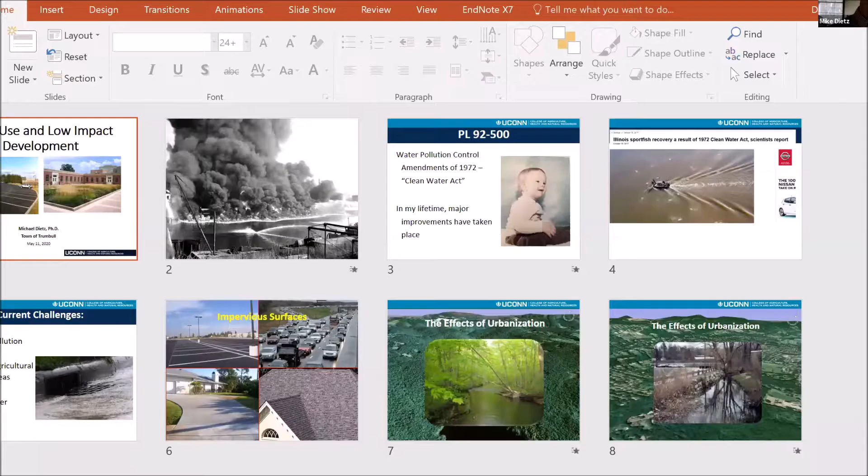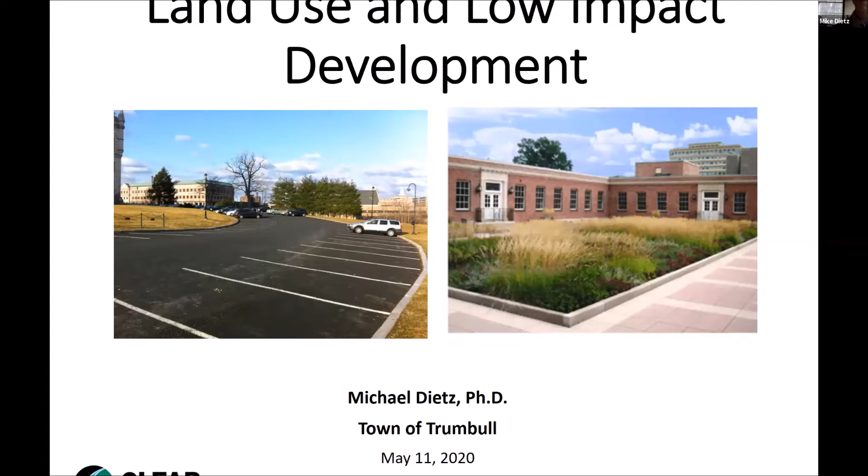Yes? Okay, all right. So I'm going to start with a bit of background information, and forgive me if you already know a lot about stormwater. I just need to make sure everybody's on the same page with a few slides on background stuff. Then I'll go through what low impact development practices are and some of the innovative things available for you guys to use in your town.

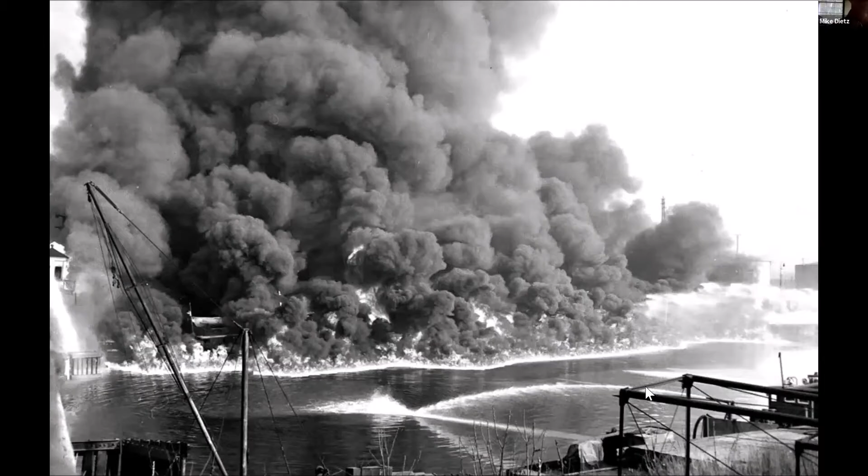So what happened as a result was PL 92-500. As many of you may be aware, that's also known as the Clean Water Act, but the formal name is the Water Pollution Control Amendments of 1972. 1972 happens to be a very good year — that's when I was born.

So there I am, and you can see by looking at me in my little frame here that I obviously had more hair in that picture than I have now. Some bad things have happened over the course of this lifetime, but as far as water is concerned, major improvements have taken place in our country, and certainly in Connecticut, as a result of the Clean Water Act.

Just as an aside, the Clean Water Act and Clean Air Acts were proposed and initiated under a Republican administration, but passed with strong bipartisan support because there were so many people, such a grassroots effort, that wanted this to happen. It's really hard to imagine this kind of bipartisan effort making something positive happen for everyone, but that's really the way it was. So just a quick slide here.

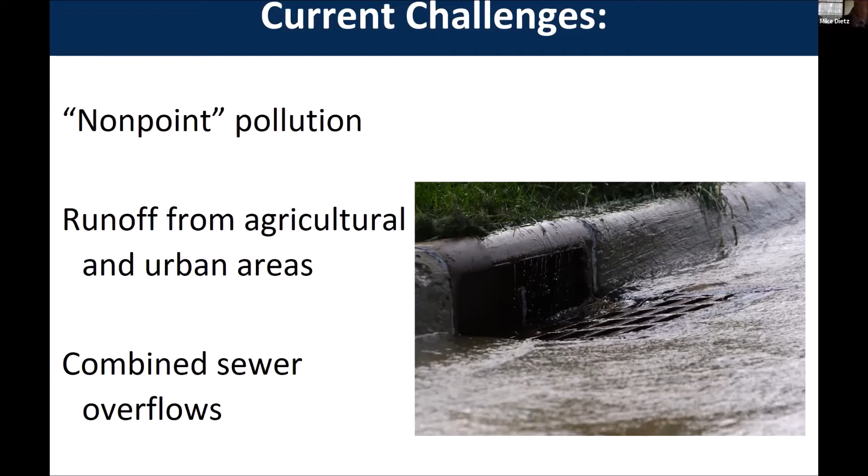What we're dealing with now is what we call non-point pollution. This is runoff from diffuse sources, from agricultural and urban areas. I'm only going to be focusing on the urban stuff tonight, but agricultural runoff is also a form of non-point pollution. Combined sewer overflows also factor into this, because there's an input from the stormwater system that causes those overflows. I'm not going to talk too much about those tonight, though I can answer questions if anybody has one.

The stormwater stuff I'll be talking about certainly plays a role in those combined sewer overflows. So what really is driving these issues we're faced with now with non-point pollution are impervious surfaces. These are surfaces like parking lots, roadways, driveways, rooftops, anything water cannot pass through.

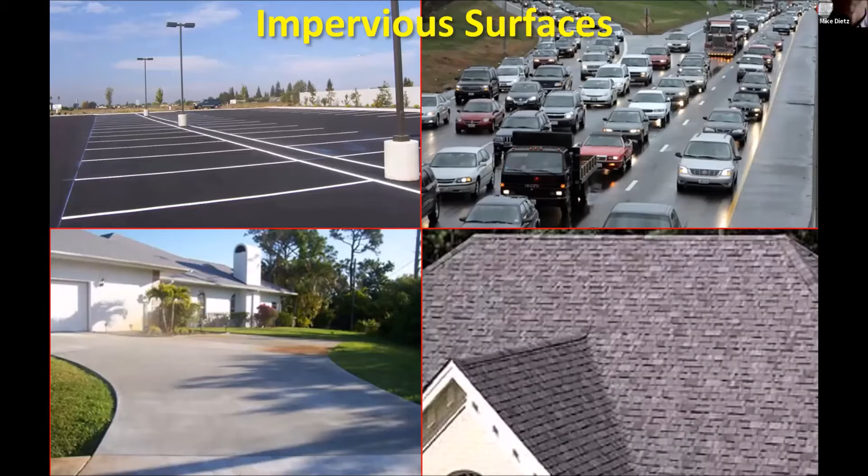Next we go one tick up the scale of urbanization. So we have some subdivisions, a few roads. A watershed like this might have a river draining it that looks something like this—a little bit different. We can see this parking lot very close to the banks of the river, and this armoring of the banks, these stones installed here, because we've started to see changes take place in the hydrology due to all that impervious surface in the watershed.

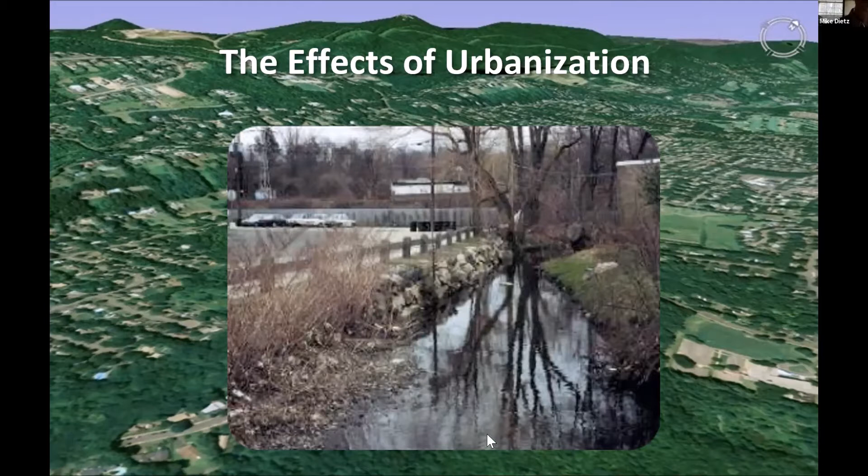We don't have as much cover over that stream keeping it cool in the summer, so it warms up quicker. These are just a few of the things you can see here, and the shape of the stream tends to get more channelized and straightened as well—a little more developed.

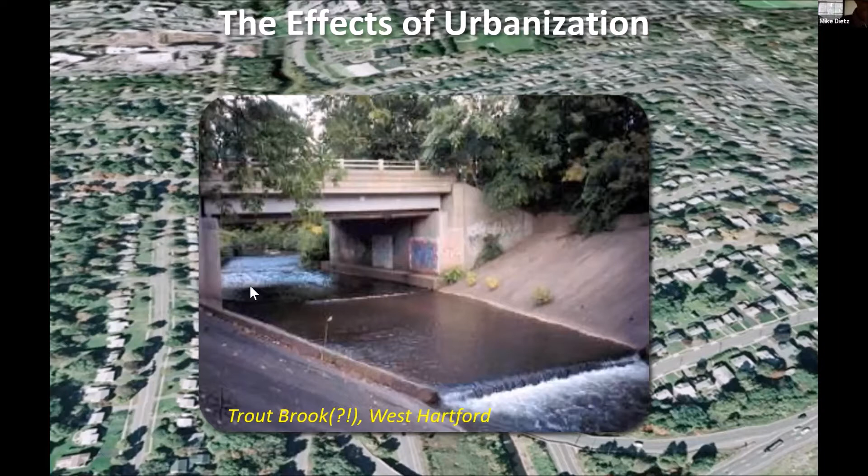This particular example is from West Hartford. If you ever venture up that way and you've seen the exit off Route 84 for Trout Brook Drive, and you look at the concrete lined channel there, and you like to fish for trout, you probably know there aren't going to be too many trout in Trout Brook these days. When we see all this armoring of the channels, you're losing all the habitat for aquatic life, and it's really not very supportive at all.

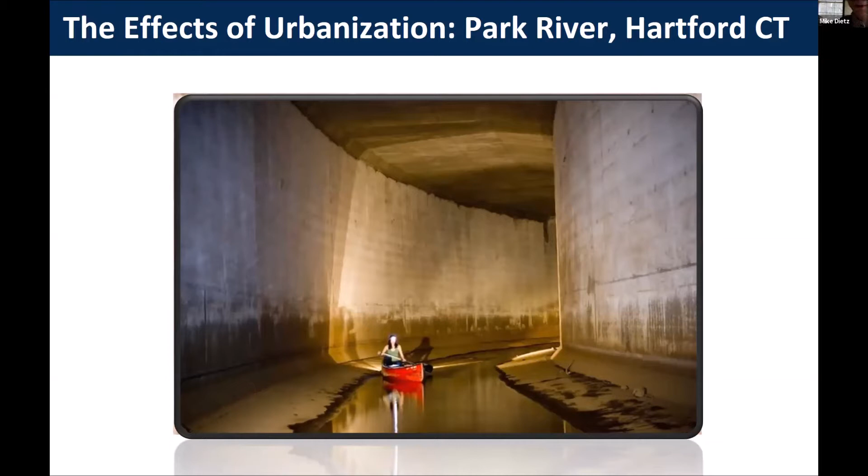That was when the Park River was put underground because of major flooding that happened in the 1950s and earlier that devastated the city. So they channelized the Park River and put it in a conduit underneath the city, and this is what the Park River goes through today. Really no opportunity for aquatic life to survive down in those kinds of conditions, as you would imagine.

So this is just a visual representation of those changes that have taken place. Again, here's that undeveloped watershed. There are going to be two graphs here. So the time is on the bottom, maybe over the course of a day or so. And on the left-hand axis here, you'll see the flow rate. I have CFS, that's cubic feet per second, but it really doesn't matter. The flow rate is the volume of water per unit of time.

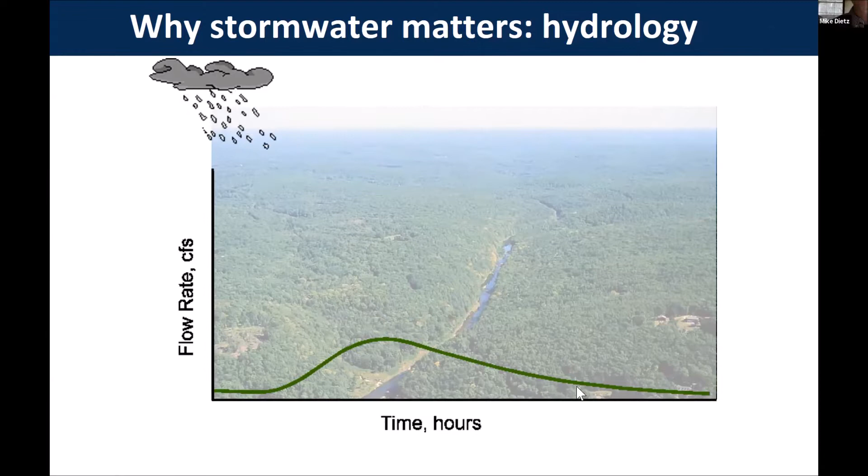So if we have a rainfall event happen on that undeveloped watershed, we might see a response that looks something like this. So we have this base flow level in the stream. You see a gradual climb up, a slow tailing off of that flow rate in that stream. For that very same rainfall event on a watershed that has a lot of development in it, like this one that you're seeing here, we would see a very different response in that stream.

So we would see much more runoff and a higher peak rate of runoff. So there's more volume coming out and it's coming off faster and it's getting there quicker. All right, so the timing of it has shifted too. So major changes to the hydrology, and this also drives changes in the quality of those waters too.

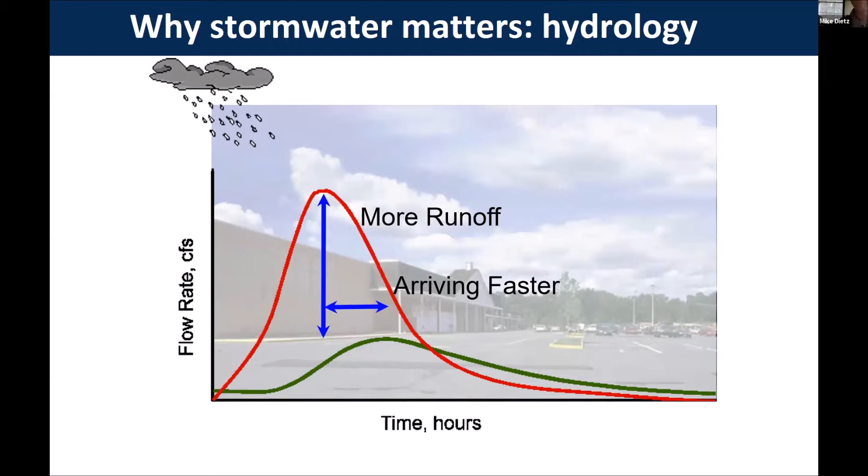So can you still hear me okay, Mary Ellen? I see somebody just came into the waiting room. I assume Bill will let her in. Yeah, I can hear you.

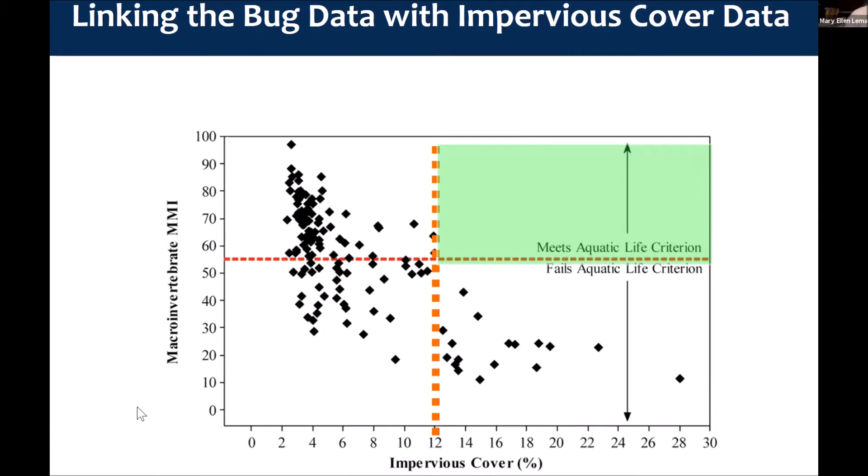Okay, good. So I'll just give you a quick view from above that will set up some of the Trumbull-specific information I'll share with you here. Some of my colleagues at the Center for Land Use Education and Research have put together some satellite data that looks at what the land cover in each pixel is. These are 30 meter by 30 meter pixels, so pretty coarse, like 100 feet square, but it's useful when you look at a large area like this over the entire state of Connecticut. This is the link for those data here if you'd like to check it out.

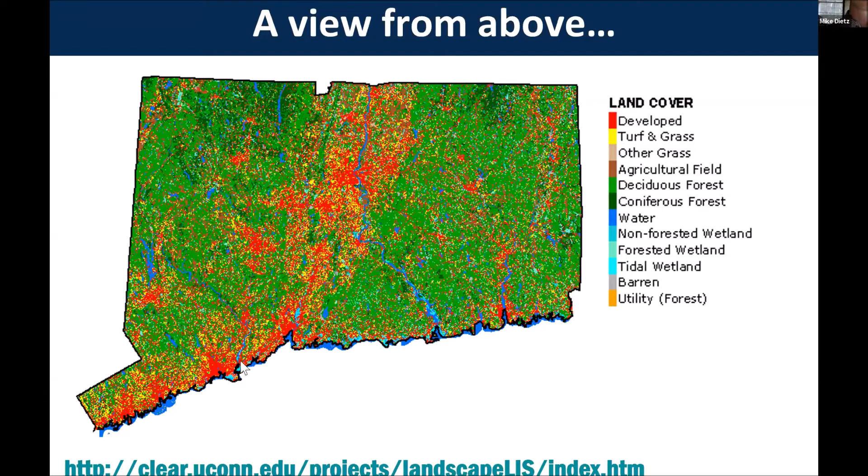But what this represents, the red pixels that you can see here are developed lands. Each pixel, the software makes a decision as to whether it should be classified as developed or deciduous forest or evergreen forest. The green pixels are the forest classes. But you kind of get the idea where our development is in the state. Around the center here, we've got Hartford and East Hartford. Down along the coast, we can see New Haven. Further southwest, you can see the Bridgeport cluster here, and you guys are obviously just north of that.

So over the course of 30 years, from 1985 to 2015, over the whole state of Connecticut, this is what happened. 155 square miles, not acres, square miles of developed land were added in the state in that 30-year period. 80 square miles of turf and grass. The turf and grass, as you would imagine, goes along with residential development. When you have houses and sidewalks, you get lawns to go with it.

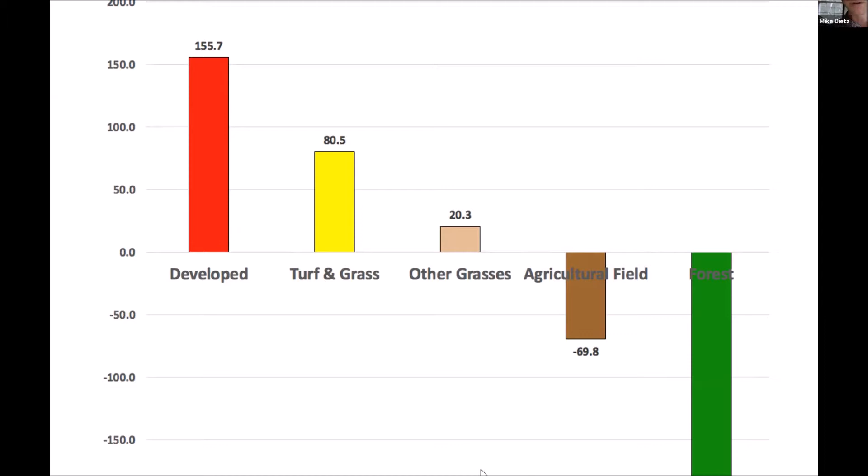So where did it come from? These things have to be at the expense of something else. So we lost agricultural fields, about 70 square miles, and 180 square miles of forest, the green one here. So you can see how this shook out over a 30-year period across the state. Pretty scary. If we compress all that development into one corner of the state, it would fill up Litchfield County, and turf and grass would fill up Middlesex County. So quite a large area when you look at it across the state.

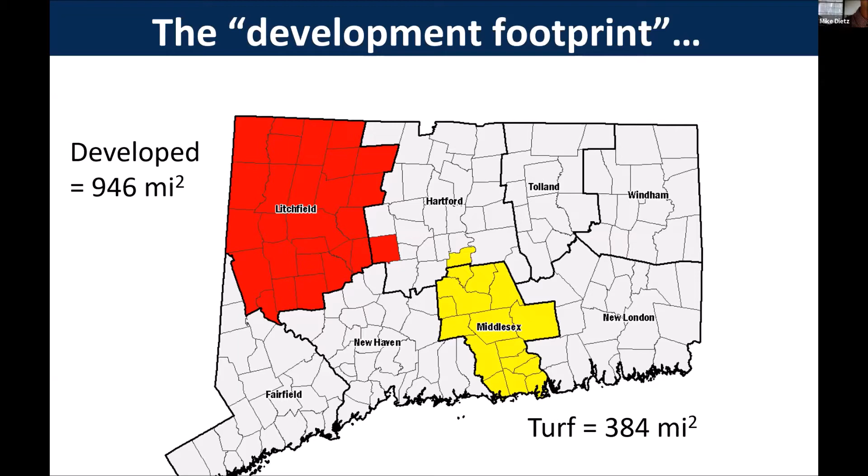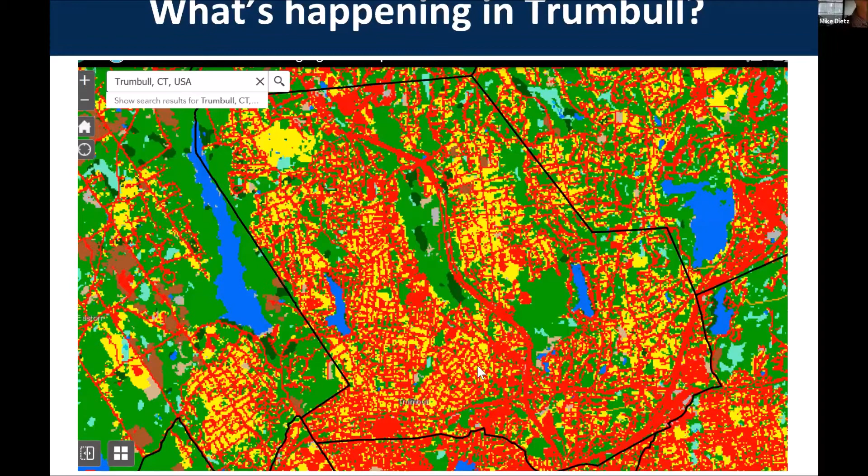So you can see there's your breakdown for 2015. So your developed lands in the town of Trumbull are about 44% of your total land area. Your forest, let's see, deciduous forests and coniferous together are about 32%. So that's your green, about a third of the town. And then about 20% is turf and grass. All right, so 44% impervious or developed land is a really high percent. If you look at it as far as averages across the state, that's one of the more developed towns that we see.

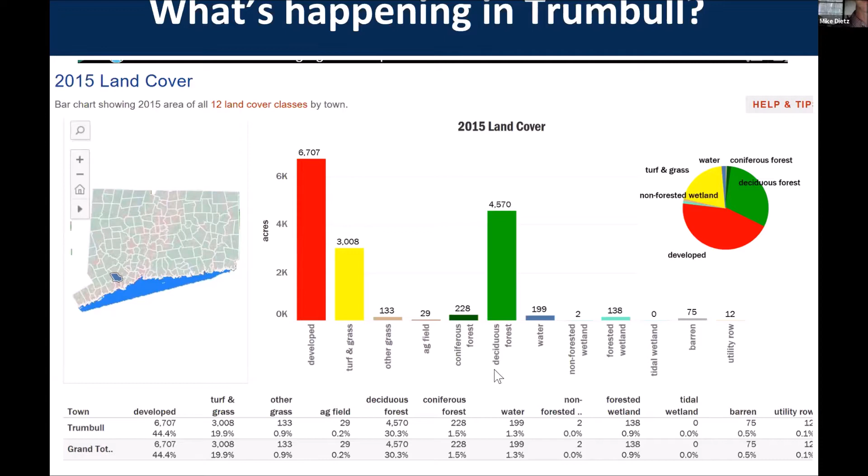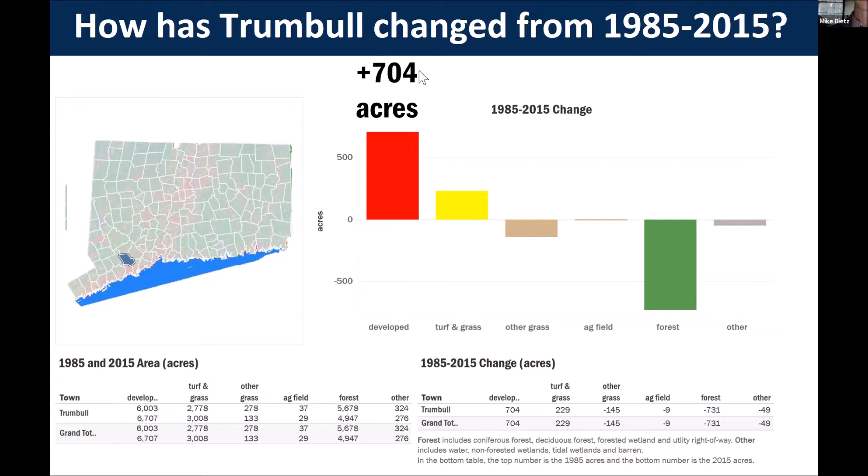And then if you look at what changed in the town from 85 to 2015, here's how it shook out for you all. So the numbers are small. Again, I'm not going to force you to look at those numbers in the table down there. I just put that for your reference. But what happened here, you added 704 acres of developed land. You added 229 acres of turf and grass. And you lost 145 acres of other grass. And you lost 731 acres of forest land.

All right, so you can kind of see how it all adds up and subtracts out over the course of time. So that's a decent amount of impervious land, or developed land, added in a 30-year period. So maybe I'll just pause there for a second and see if anybody has any questions about that before I move on. Is that surprising? I'm sure that just like other parts of the state, the past few years since the recession, we didn't see a ton of growth. So I would say since 2012 or 15, probably haven't had a huge growth spurt in the state like we have in some parts of our past. But we all are well aware of the building booms that happened in the 1980s and 90s around here. Good. So if there are no questions.

I have a question. Yeah, sure. Go ahead, Marshall. Okay. We are a fully developed town. There's virtually no undeveloped land. We're at a tear down and rebuild stage. Gotcha. And I know as I've sat through zoning hearings and things, we're looking for changes so that what's being done will take the groundwater, not have runoff, to take care of those changes. So looking at really what happened until 2008, where we reached fully developed, I don't get as nervous because we don't have the acreage to lose anymore.

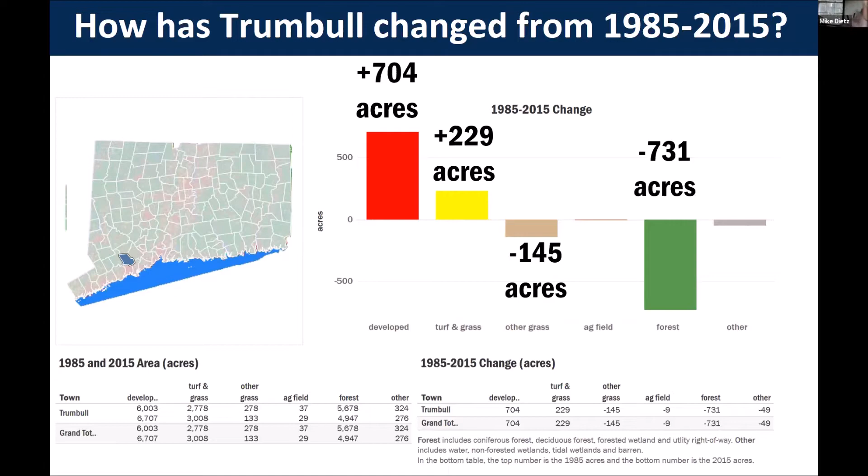All right. So this is just the last little piece here about really the magnitude of this issue. So I come from a blue collar family. My uncle is still in the construction business. So as you can imagine, with me as a water guy talking about this stuff, sitting around our holiday dinner tables, the conversations can get quite lively. So my uncle always tells me, what are you worried about? It's not that big of a deal. It's just rainwater. Why do you make such a big deal out of it?

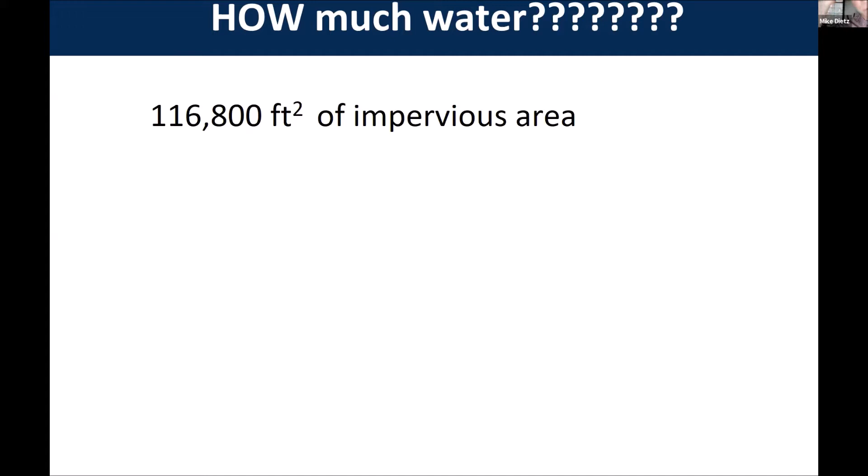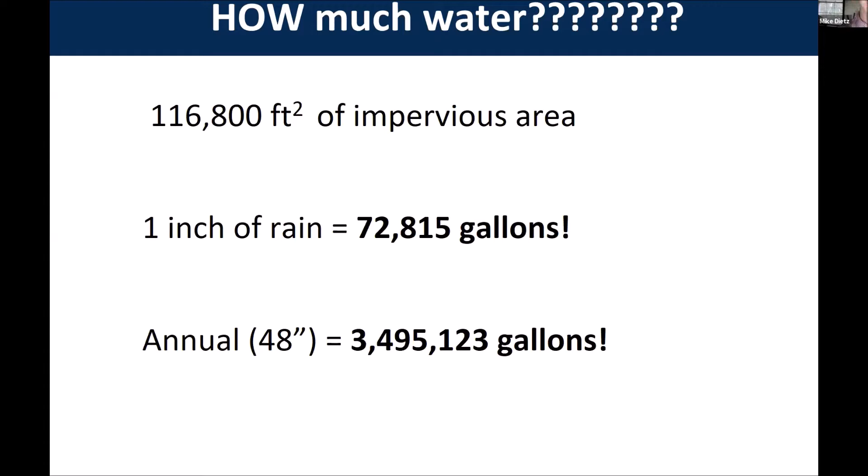If we get an inch of rain, 72,000 gallons of water are gonna run off that site. 1 inch of rain. You think about how often we get an inch of rain. It's pretty common around here, right? That's an unbelievable amount of water that has to come off that site, and it has to go somewhere. In an average year, we get about 48 inches of rain, 3.5 million gallons off of 2 small buildings and a parking lot.

So now I know, as you said, you are a developed town, but go to Bridgeport, go to New York City and multiply those numbers that I just gave you from that one tiny little site. And you'll see just for a simple 1-inch rainstorm, the billions and billions of gallons of water that have to run off and go somewhere. Now you can understand the magnitude of that problem. So it really is a big deal when you add it all together.

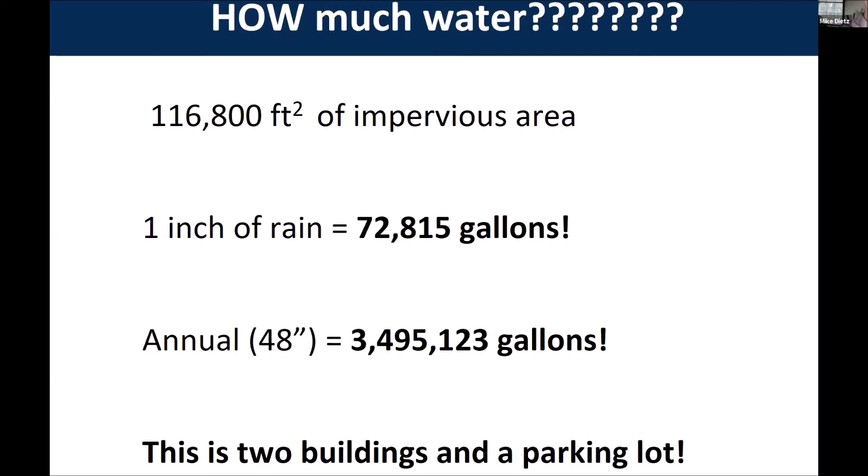So now we'll go into what we can do about it. So I'll talk about low impact development and site planning here. This is also called green stormwater infrastructure, but the term low impact development, or LID, started in the 1990s from the state of Maryland. They were dealing with issues with the Chesapeake Bay. So all the goals of low impact development really center around that hydrology that I've talked to you about. So trying to preserve the hydrology of that site before it was developed. That's the bottom line here. All right, so all those things that go into that are what we're trying to focus on.

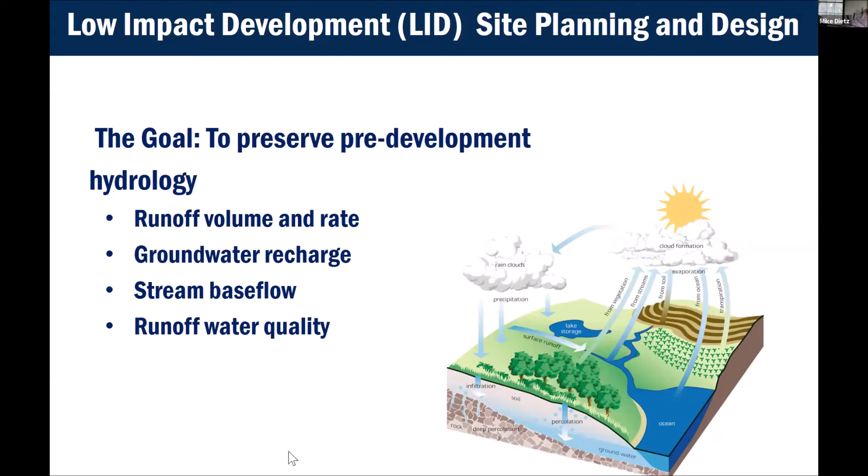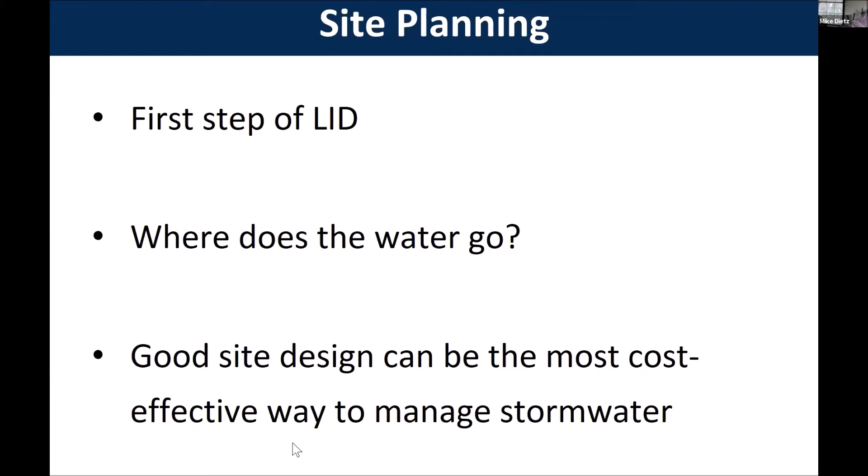The planning of that site before any development even occurs, and again, I understand you guys aren't in this phase right now, but even with a redevelopment, proper site planning can really go a long way. So just asking, where's the water currently going? Is there a way we can take advantage of the natural system, natural movements of the water that are taking place? Instead of having high cost things to put in, can we design it in such a way that it manages water on site?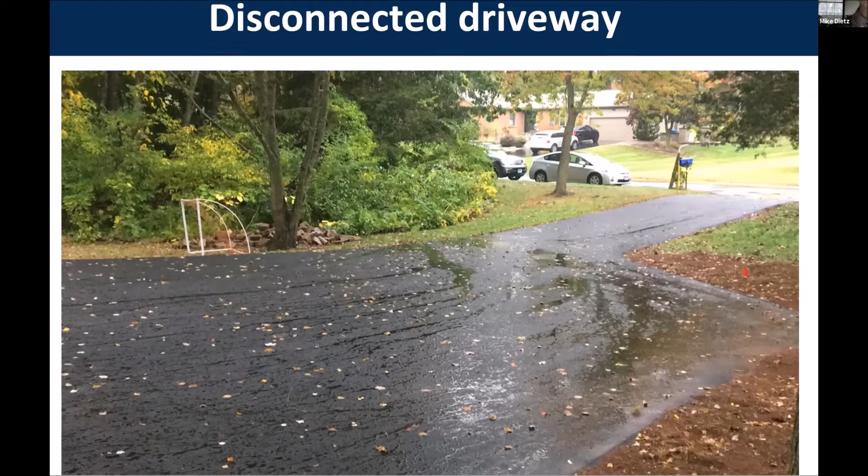So this site design, and again, every site is different, but sometimes you do have the ability to make a small change in where water is directed, and that can save a lot of money in the long run. So the practices that we'll go through here, we'll talk about bioretention or rain gardens, pervious pavements, green roofs, and rainwater harvesting.

The gutter downspouts come down the side of the house. They're angled through the foundation and they go into the sewer line inside of the house. So the roof of that entire building is fed directly into the sewer system and is part of that combined sewer problem that we have in Hartford and many of our other big cities. So a very simple disconnection of that pipe and directing that water out into the front yard made a tangible difference here at this house. And no, one house didn't solve Hartford's water quality problems, but you add all those houses together and look at the potential disconnects that you could do, and then it really starts to add up.

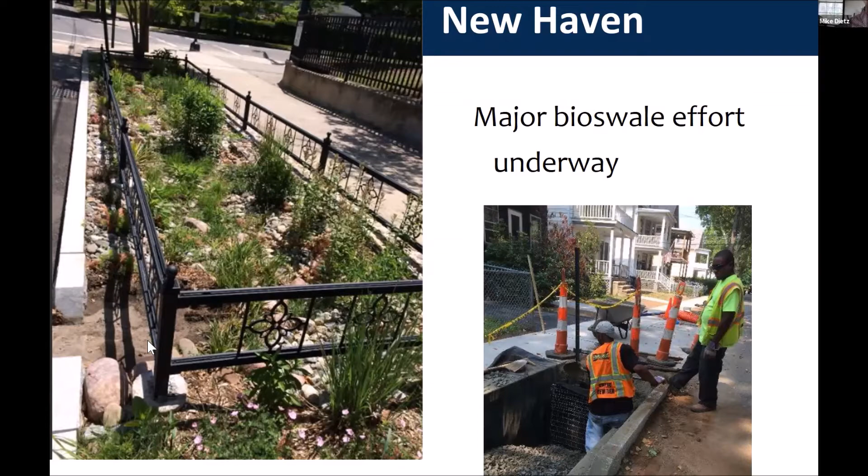Here's another example, New Haven, another heavily developed city. They have major issues with combined sewer overflows, so they have a big effort underway to handle stormwater and keep as much of it as possible out of the system to avoid that problem in the first place.

Then down in Washington, D.C., I was there for my annual conference in February. I just happened to walk by these, didn't even know they were there, but two blocks off the mall in a heavily developed area with basically impervious cover everywhere you look, they redeveloped this site with rain gardens in between the sidewalk and the road.

Same thing here, this was down at the wharf, a newly redeveloped area. They put in a pervious pavement bike path here, which I'll explain more about shortly, and then a narrow bioretention or rain garden strip in between that and the sidewalk. So it is possible to do these things even in heavily developed areas.

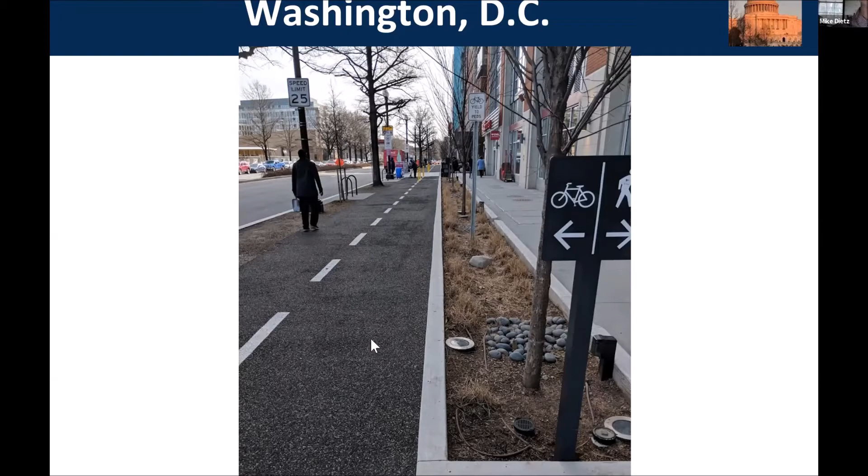Maybe I didn't explain this well enough at the beginning when I first introduced rain gardens, but the goal here is to get that water into the ground, very close to where it's generated - taking water either off the roof of the building, off the sidewalk, or even off the road, as you saw in New Haven, getting it down into the ground as it did before that site was developed. That's the key.

The plants that go into these, I'm not going to go into detail on them, but we have a list for Connecticut that we've put together. We also have lists for other states, and we've expanded this - I'll talk more about that in a minute. These are plants that can tolerate wet conditions sometimes but can also tolerate dry conditions at other times, ones that are native to this area around the outskirts of wetlands.

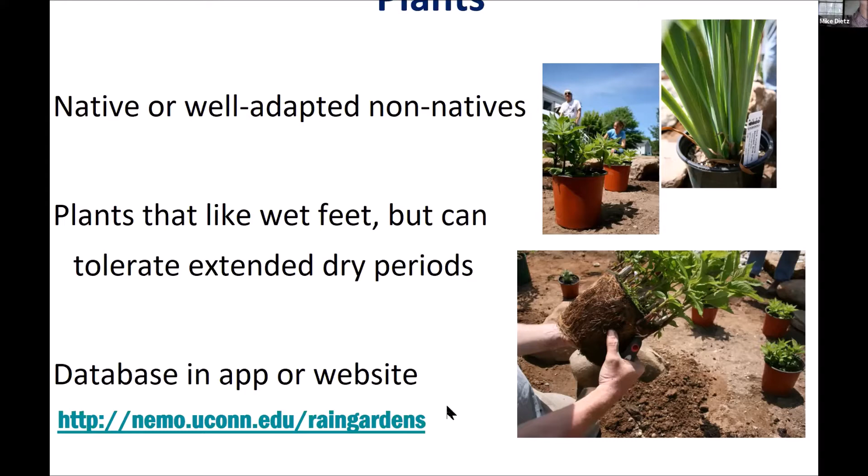I'm a very practical, hands-on guy. I'm not going to try to tell you that all these things are a silver bullet, that you just put them in and they fix all your problems and pay your kids' college tuition and everything else. This is reality, and everything needs to be maintained - it's just different maintenance.

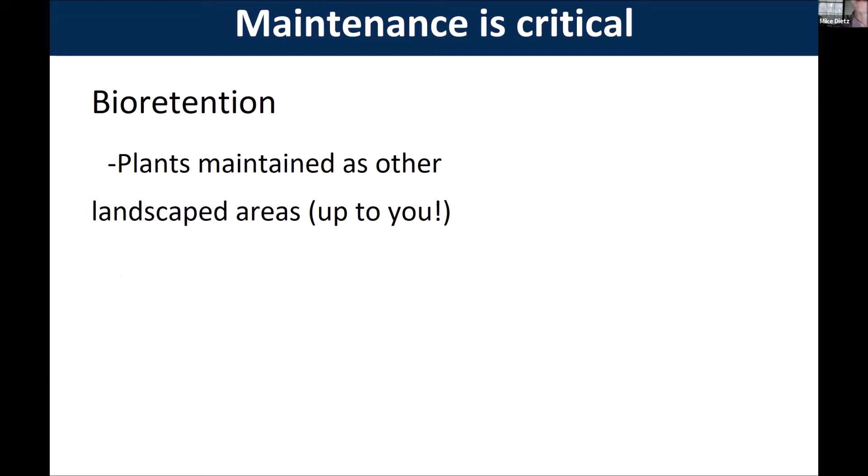For bioretention, the plants can be maintained like other landscaped areas, really up to you how you do that. You need to watch for erosion, just to make sure it's not cutting out any soil anywhere. But the most important thing is to make sure water can still get into it and it has the storage that it was designed to hold.

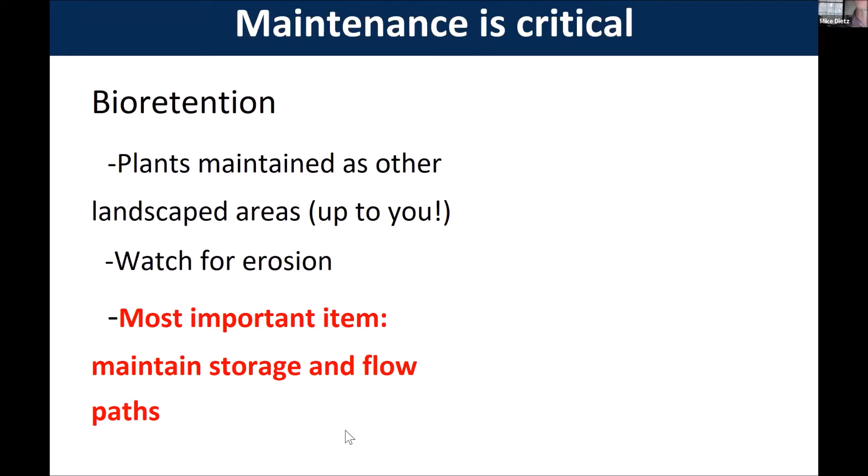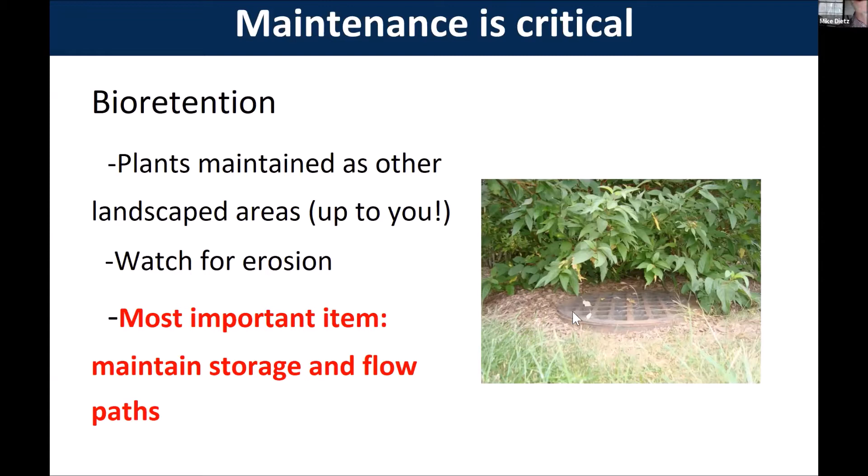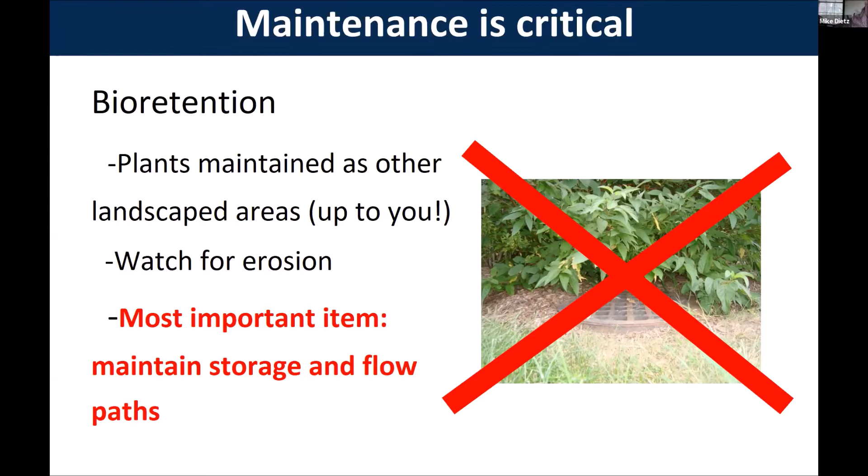Well, looks like I have a pretty good thunderstorm rolling through here right now. So hopefully I will stay online with everyone. Just wanted to let you know, just in case something happens, that's what's going on.

This is just a variation on that theme. This is Victor Benny from the town of East Lyme. He basically built his own prefab box here and saved a lot of money. So they're making these in town, installing them wherever they can. It's the same idea, just getting that water down in the ground before it leaves the site.

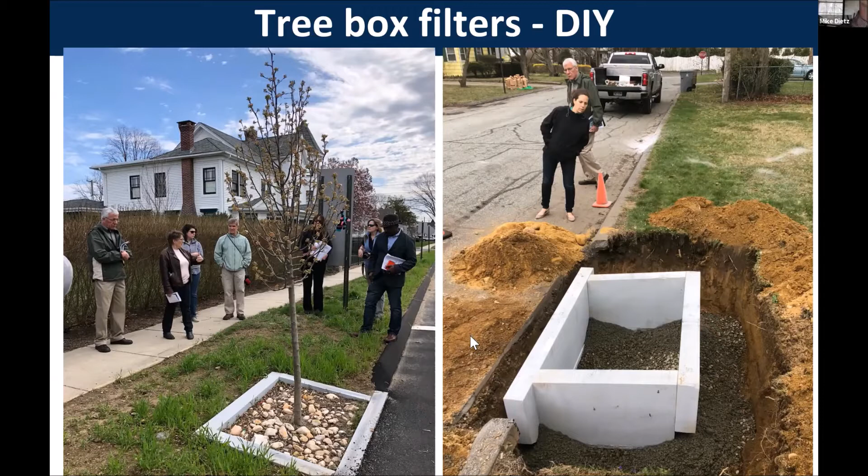Green roofs are another nice tool. These are especially nice in really developed areas where you've got a lot of rooftops. Our big cities—Chicago used to be the nation's leader with over 1 million square feet. New York City is rapidly taking over as a leader in the country. Europe has a lot of these too; they've been far ahead of us in implementing green roofs.

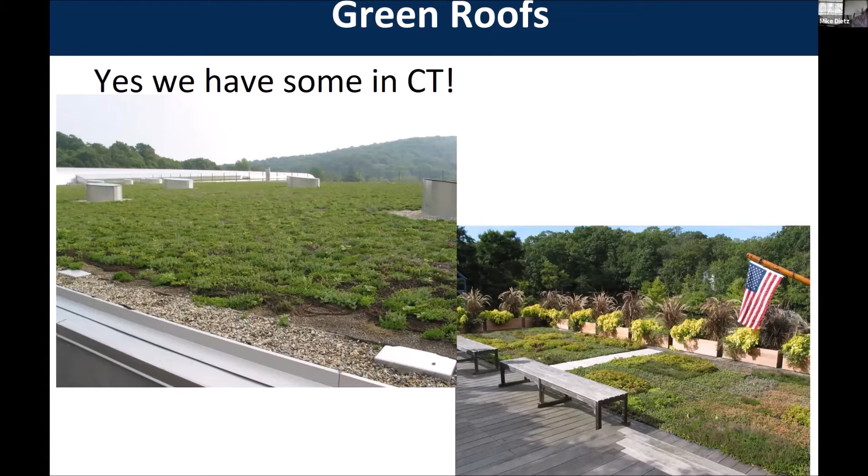So this is a very thin media, not a thick, heavy soil layer—that's the older style. This is a thin, maybe 4 to 5 inch thick layer of expanded shale and other minerals that allows low plants like sedums to do well up there. But you're not going to grow big trees in a situation like that. The media is nice and light, which makes it suitable for buildings that don't have huge concrete floors for structural support. So we do have some of these in Connecticut.

We've got quite a few up at UConn. They provide a nice energy benefit too, so it's not just the stormwater benefit. These will capture and release about 50% of the rainfall that falls on them over the course of the year. There's research that was done on this right here at UConn, but they also do have that energy benefit as well—reduce heating and cooling costs.

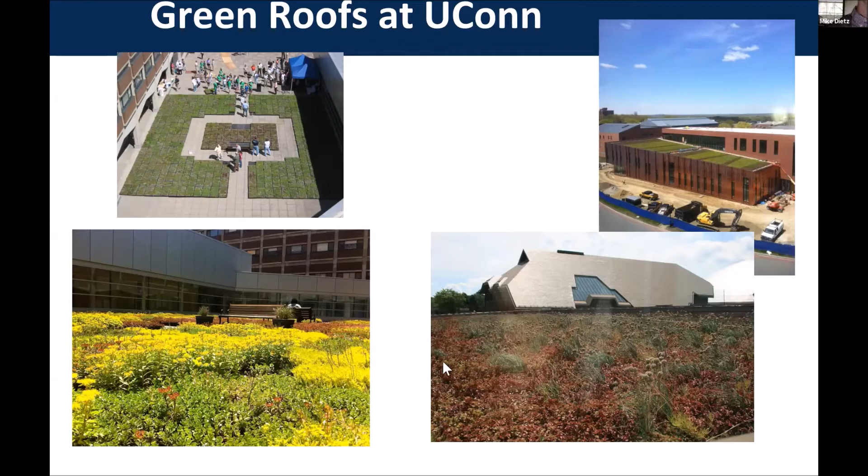And they can also be utilized as nice space. This rooftop—if this were a traditional black EPDM rubber roof, nobody would want to be sitting out there in the summertime. You would roast out there; it would not be pleasant at all. But now this makes nice habitat for students, for example. This is at Aetna in Hartford, just a nice example there.

There are also several nice alternatives to traditional concrete and asphalt for our pavement surfaces. I'm going to go through a few of these in detail for you.

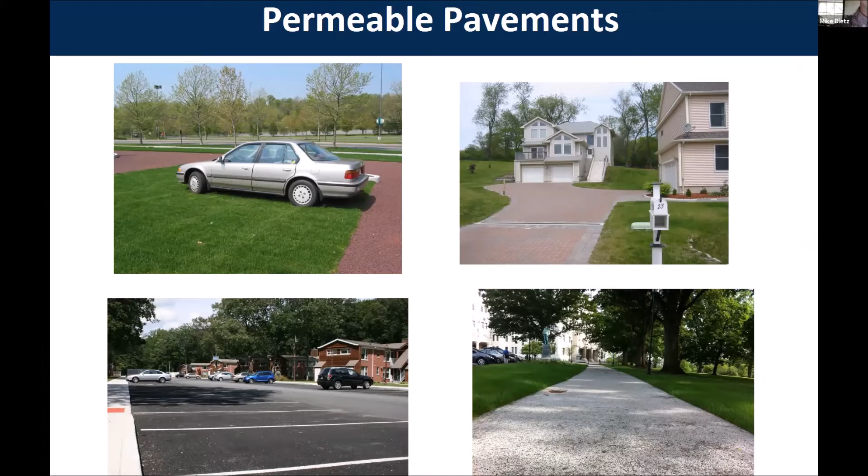The one thing they all have in common: the top layer is going to vary. I just show this porous asphalt as the top layer here, but really any of the pavements I'm going to show you could just substitute in for that top layer—what's below it is really what's important. So we have a coarse stone base, usually about inch-and-a-half crushed stone, then a 2 to 3 inch choker course, which is also a smaller diameter crushed stone. This is what allows those pervious pavements to function and lets that water sink down into the native soil. Water passes through that top pervious pavement layer, and then gets down very quickly into the subgrade.

So if you tried to install the regular pervious pavement top course over regular processed gravel, which you would put under a parking lot, it's not going to work well, because that processed gravel has a lot of fine material in there.

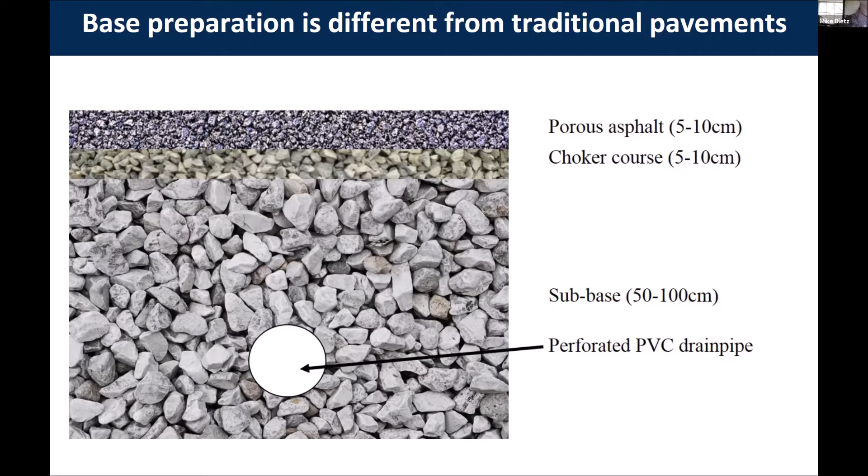And when it gets packed down, it does not allow water to move down through it very quickly. So that's a key difference here that all these things have in common.

So this is the first type. These are permeable interlocking concrete pavers, or PICPs. These are very similar to traditional block pavers that you may have seen on a patio or like a cobblestone.

You know, in big gathering areas, but they just have spaces in between so that when you put them together, they get filled with a small crushed stone and water can pass through it, okay? So these are just variations on the theme, same idea here.

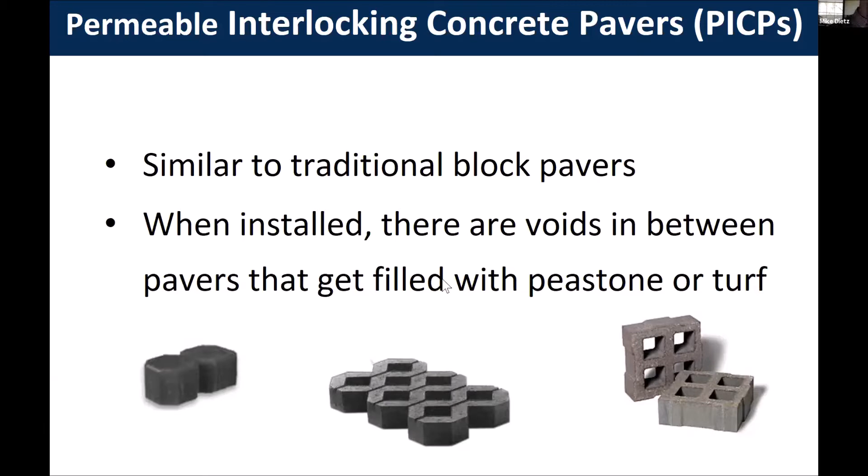Can I interject and ask a question, please? Yes, yeah, go ahead, Tony. Yeah, so Tony Silver from Inland Wetlands and Planning and Zoning.

So two questions, and you might be getting to it. One is, are there any towns in the state that require new development to have permeable surfaces? And two, is there a cost differential between traditional and permeable?

I'll answer your second one first. So it depends on the type of paver. The paver blocks themselves, so like these blocks that you can see right here in this picture, they are the same price as regular paver blocks that you might put down on a patio.

But to have somebody install that on a sidewalk or a large area, it's going to be more expensive than regular concrete. It's just this manual... they have some automated methods to put them down now, but it's labor intensive.

If you're talking about some materials, which I'm going to talk about in a second, like permeable asphalt, permeable concrete, that material cost is about 50% more.

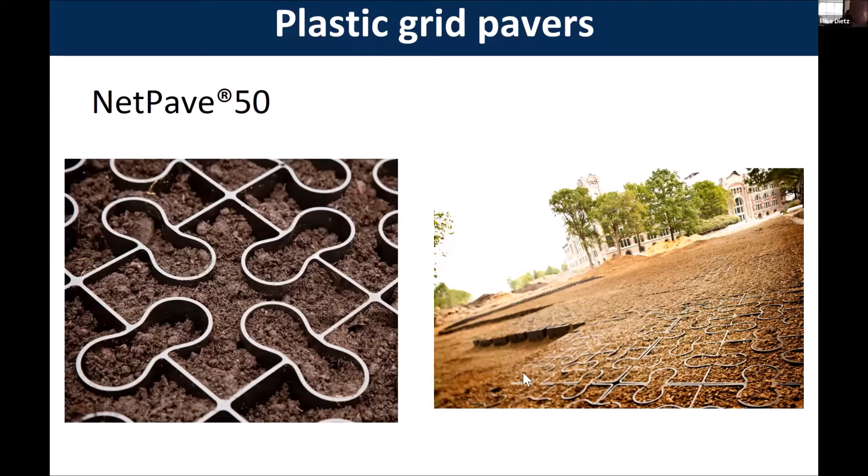This is pervious asphalt. It's a variation on the mix that leaves the sand out, so it's just the aggregate material and an asphalt binder that holds it together. It maintains some of that porosity and allows the water to pass directly through that pavement. The nice thing about this is it goes down with the same equipment as regular asphalt, so that's a huge plus. The guys can use the exact same equipment.

And Tilcon, one of the biggest pavement companies in the state, put a couple of lots in up at UConn. So they're very knowledgeable about how to do this, and they've got the mix dialed in pretty nicely these days. It's a pretty easy product to get these days where it was not before.

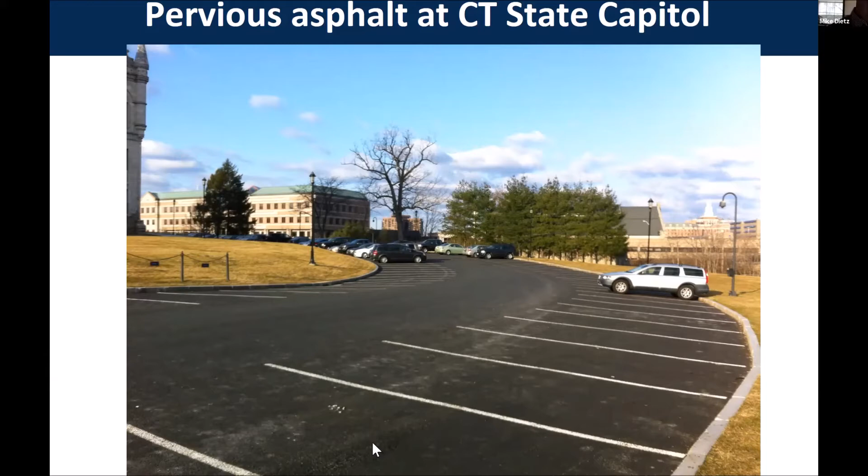Here's another few examples up at UConn, a couple of parking lots near our student dorms. The parking lanes were paved with pervious asphalt, while the travel lane was regular asphalt. So that can save you a little money too.

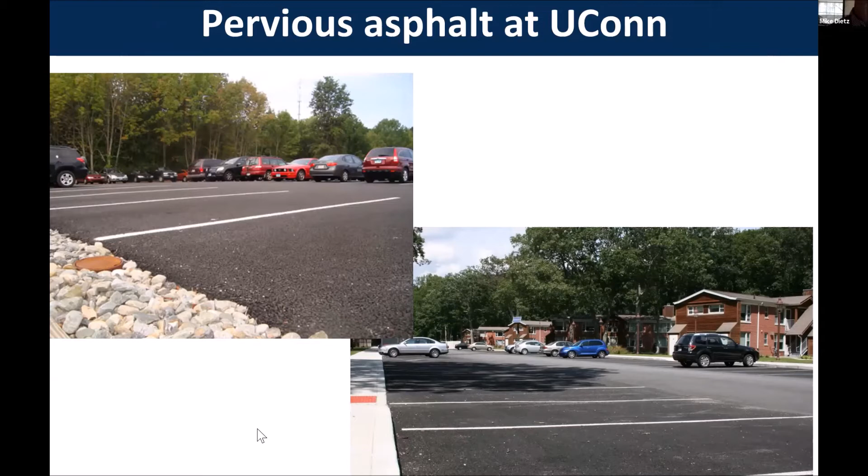Pervious concrete is also an option. Just like the asphalt leaves the sand out of the mix, same thing for this. If you've mixed up concrete before, you know it's some sort of stone aggregate, Portland cement, sand and water. This leaves the sand out of the mix, so it's just Portland cement, water, and aggregate, but in a very specific ratio.

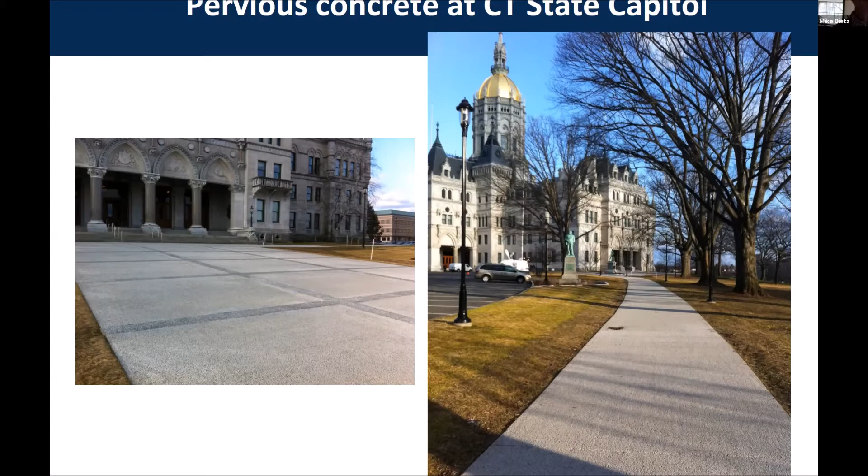With regular concrete, if you're off one way or the other, you pour it, it cures, and you're fine. This stuff is very finicky. The ratio is extremely important, and it goes down with a different technique than regular concrete. It really should be done by someone with experience installing pervious concrete. The National Ready Mixed Concrete Association maintains a list of certified pervious concrete installers you can refer to if you'd like to find someone in your area, because we've had a couple of failed projects that did not go well.

This company up in Yarmouth, Maine started making precast pervious concrete sections, 5 feet by 8 feet. They build them in their facility with all the quality control, and they cure for enough time, which is another issue with pervious concrete. It really needs to cure for a much longer time compared to regular concrete.

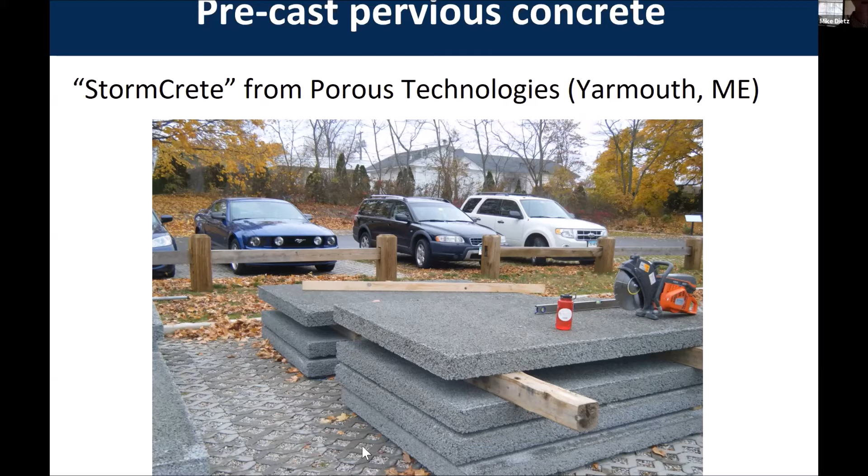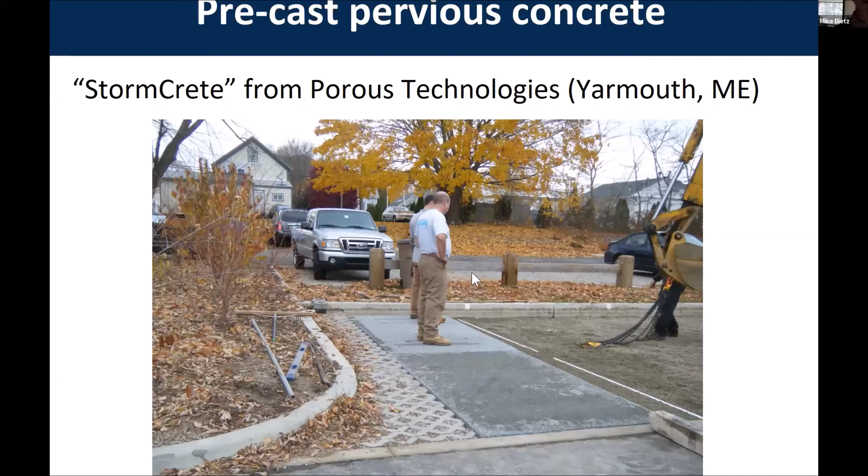So they make these in their facility and deliver to the site. You prepare your base, you can see this crushed stone down here, drop it in place, and you've got an instant parking area or sidewalk or whatever it may be. We've installed a bunch of these up at UConn. Here's a lot where we replaced all the parking stalls with their precast slabs. It's been holding up extremely well. We're really happy with this product so far.

Just like with the bioretention, I'm not going to sugarcoat it. The pavement surface will hold up fine. Because of that base material, you don't have frost heaving in the winter like you do with regular lots. We don't have cracking. We have a 10-year-old lot with pervious asphalt, and there's not a crack in it, not a frost heave, 10 years old. That's unheard of. But if you neglect the maintenance and don't vacuum it out, you're not going to get the infiltration of water you want.

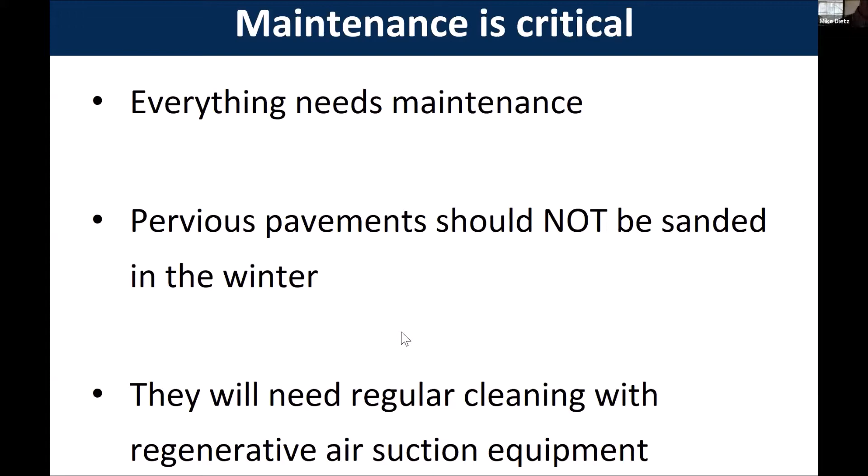First of all, you don't want to sand them in the winter. They can be salted, and they don't actually need as much salt because when that water melts it has a place to go, so you don't have the refreezing like you do on regular asphalt. But you don't want to be sanding them at all. And cleaning needs to be done—how often just depends on how much sediment gets loaded onto it. A high traffic area will need it done more often. But it needs to be done not just with a regular street sweeper, but a regenerative air sweeper that can really suck out that material and get it out of the cracks and crevices.

Is there a special salt that's required? No, for the asphalt it doesn't matter. You can use the same regular salt—sodium chloride, magnesium chloride, any of those.

I had a very bad experience with my tenant putting lots of salt on the steps of this house. The porch fell apart, and doing a little research, you find out there are only certain salts we should be using on concrete. With concrete, yes, you have to be careful. With asphalt it doesn't matter, but you're correct—with concrete, especially if it's fresh or recently installed, it's more susceptible to the salt. Yeah, that's a good point.

I'm going to disagree with that maybe—like the stuff you buy for cat's paws, that cat stuff. Yeah, I'm not sure. I know that up at UConn and many other places they've just been using the standard sodium chloride, and it's been holding up okay.

But yeah, I'm not sure which of those other products would be the best. In general though, the best thing is just to use less of it, and that will definitely lessen the problems. You don't need as much for sure with these pervious products. But that's a very good point.

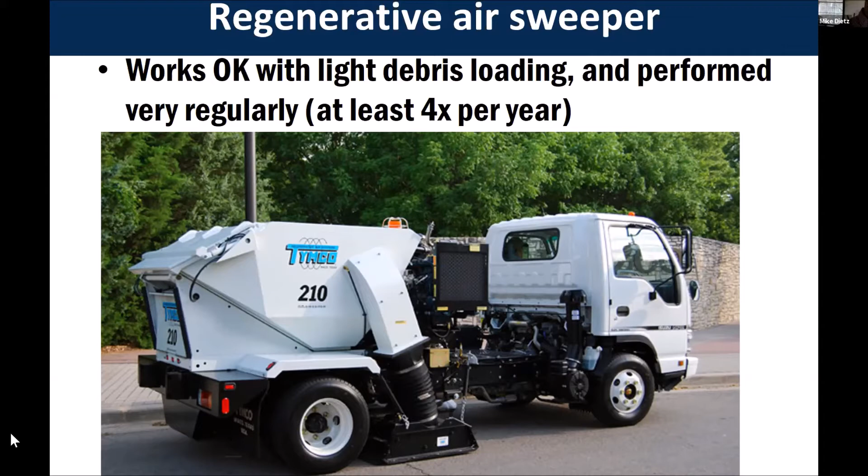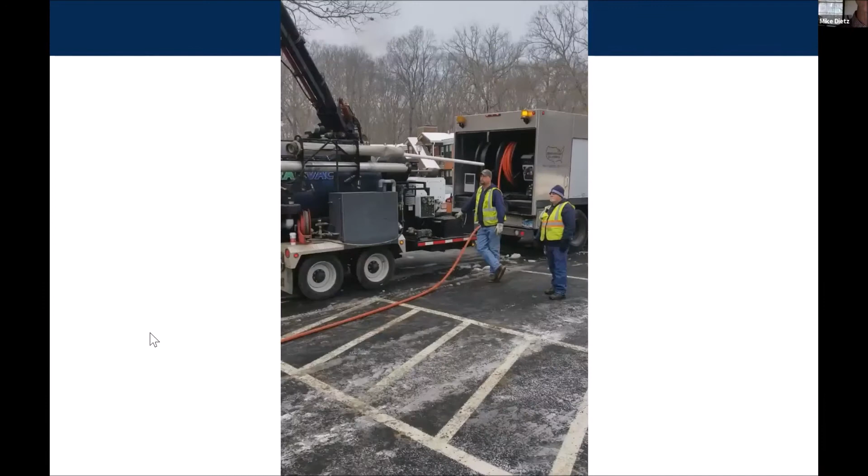So big trucks always equal big money in my experience. Again, this is my uncle's construction business. You know, whenever he shows up at your door, it's $1,000 no matter what happens. So you want to try to stay on top of that maintenance. So here's one of these lots up at UConn before the maintenance was done. Here it is after. So it really did renovate the infiltration capacity.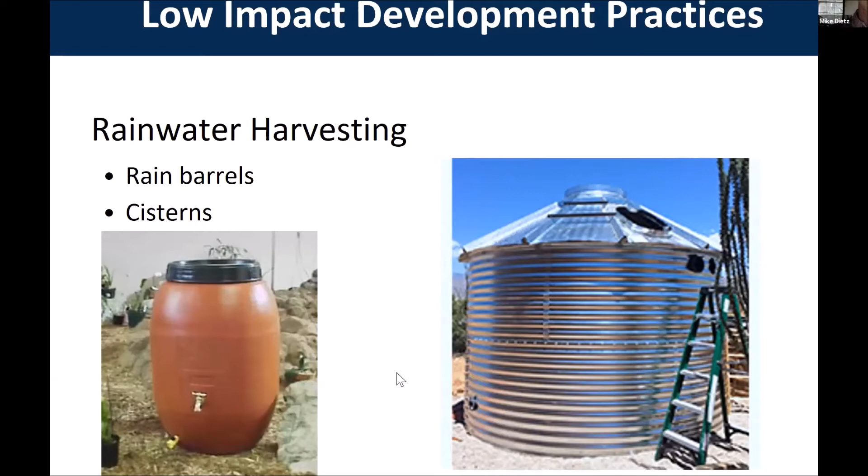I'll just show you a couple of our tools that we have available that can assist you in highlighting some of these things that I've talked about and seeing what's around your area and around the state. So first of all, we developed an app for rain gardens. We've been doing educational outreach on this stuff for quite a few years, but in the advent of the smartphone era, we decided to take this information online. So we did have this for both platforms, iPhone and Android. Currently, the Android one is not working, but the iPhone version is still working right now.

So this is your main screen that you would get. Some of the basic information is in there, but the really cool tools are in the design section here. So there's a sizing calculator, which you can use if you know how big your drainage area is. Let's say it's 25 by 30. You can select your storm size and your storage depth, and it will tell you how big your rain garden should be. It also, your GPS.

Oh, go ahead, Richard, sorry. Sorry, will there be an Android app? Will it be working in the future? I'm hoping so, because I'm the lone Android guy in my office. So I've been pushing hard to get this back up and running. We do have somebody working on it now. If you check back with me, I'll give you an update in a couple of weeks. Okay, is there a PC version or an online version as well? Yes, and I will show you that on the next slide. Okay, thank you. Yep.

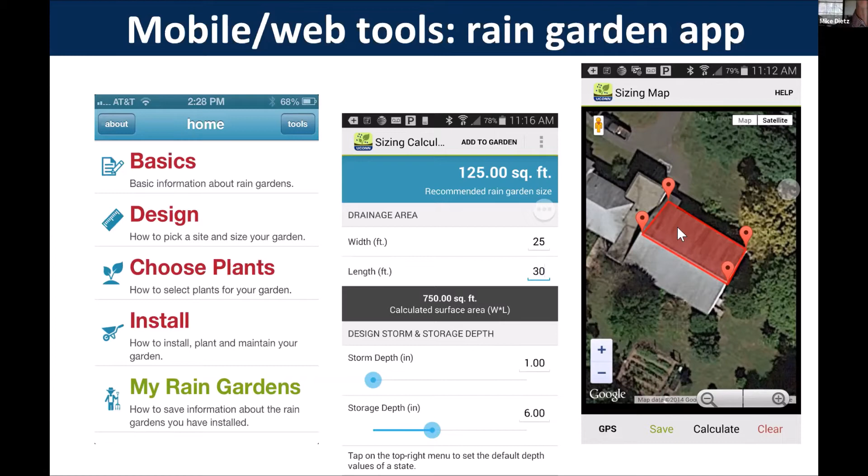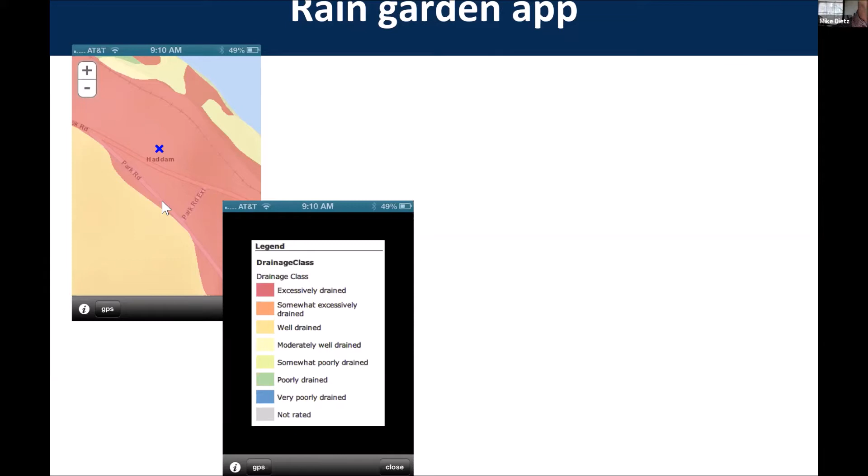So the other thing that this can do, and the website can do this also, it zooms in on the imagery and you can tap out the area that you want to treat. So let's say you're using this back roof here and you'd like to redirect that runoff to a rain garden. You tap that out and the app will tell you how big it is and how big the rain garden should be to treat it. It also pulls in the soil drainage class from the USDA soils layers. So you can see roughly what your drainage is on your site, whether you're well drained or poorly drained. So just a rough estimate to give you an idea.

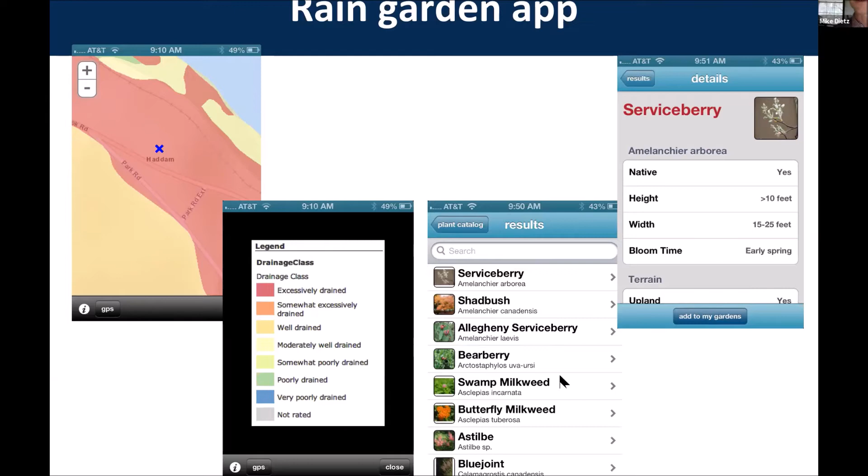So the other thing you can use, this is something we started here in Connecticut, and then we expanded and offered up to all of our partners around the country. So we have thousands of entries in here now. So this is a low impact development atlas. People have entered in where they've installed rain gardens or permeable pavements, that sort of thing. And you can zoom into your town, your area, and see what's installed near you. So it's

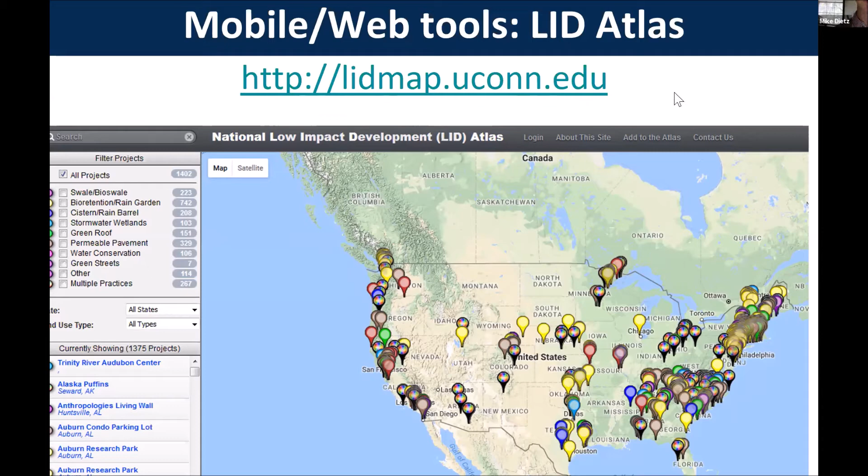lidmap.uconn.edu. So this is accessible just through the regular website if you go to it on a PC. And if you look at it on a cell phone, it automatically will adjust. And the mobile version is quite slick. So you can see what's nearby you. Click on the little balloon and you can see some information about it, a picture and a description. And you can actually add your own practice to it. So if you have something in your town that you know should be on there and is not, you can add it. You can log in using a Google login and add that information. It's pretty cool.

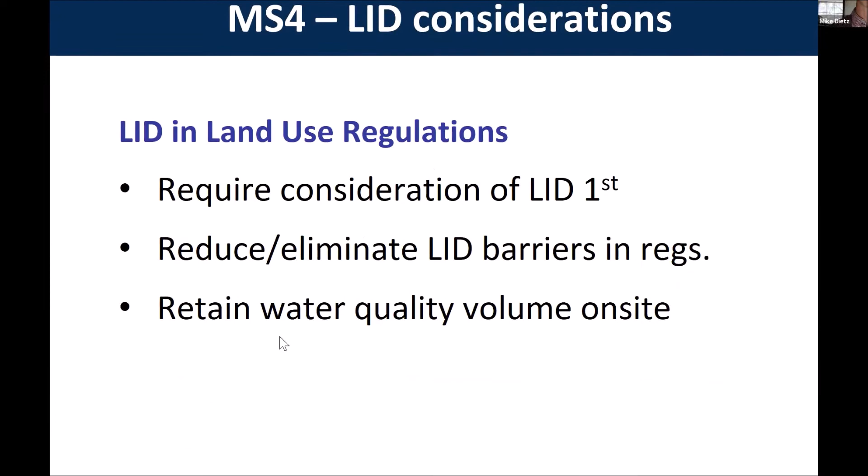And as I mentioned before, this is where LID does come into play with those regulations. So towns are now required to put into their regulations that people that are bringing stuff to their boards, they require consideration of low impact development first. So they have to justify why they couldn't use it. You have to reduce or eliminate barriers to LID in the regulations. And you have to retain the water quality volume on site for new and redevelopments. So this is basically the first inch of runoff off the site.

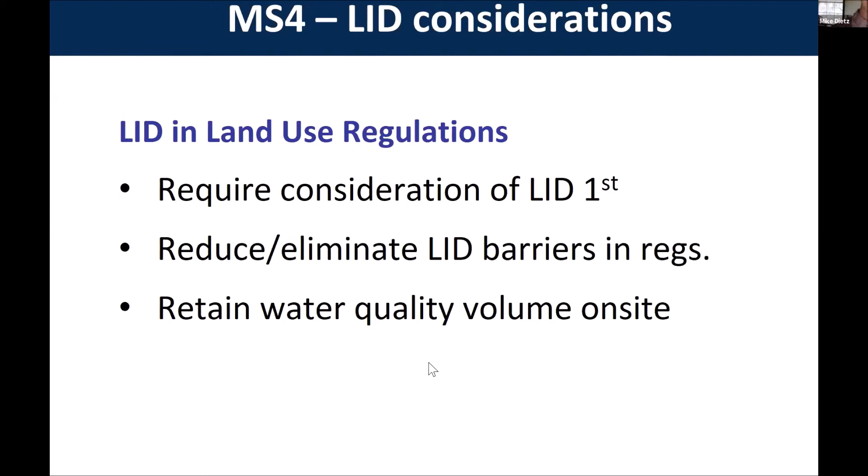And it does vary for heavily developed, so that would come into play for you guys. So the restrictions are, I think it's the first ½ inch that you have to retain if you've got over 50% impervious cover on that site. But these things are in play. And the last thing here, towns are now required to reduce directly connected impervious area by 1% starting this summer, July 1st. They did allow a 5-year look back so the towns can take credit for things that happened all the way back to 2012. So if you know there were any projects of things that I talked about tonight, that definitely can be used and counted towards your MS4 requirements.

So to wrap it up, how are we doing here on time? Pretty good, just under an hour. So that's what I find is kind of the limit with Zoom. Everybody starts to get a little squirrely after an hour of this.

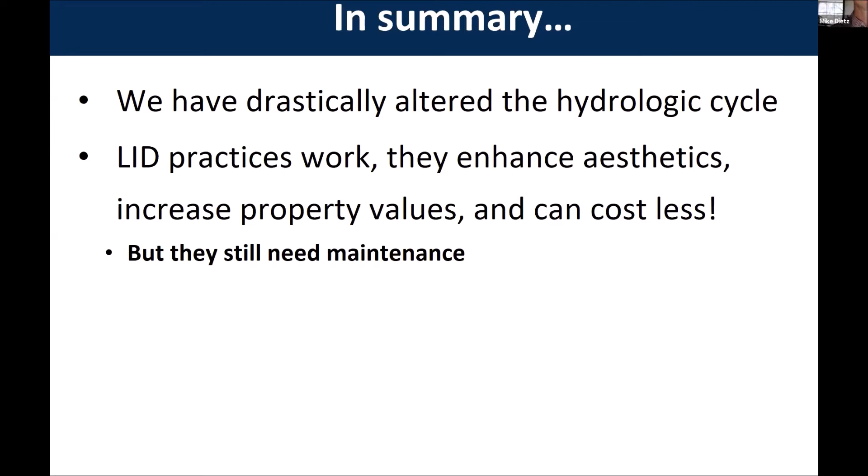So we've drastically altered the hydrologic cycle just by the nature of our developments. Low impact development practices definitely work. They enhance aesthetics, increase property values in some cases, and they can cost less. They don't always cost less, but they can in certain situations. They still need maintenance. I'm not trying to sugarcoat everything here for you.

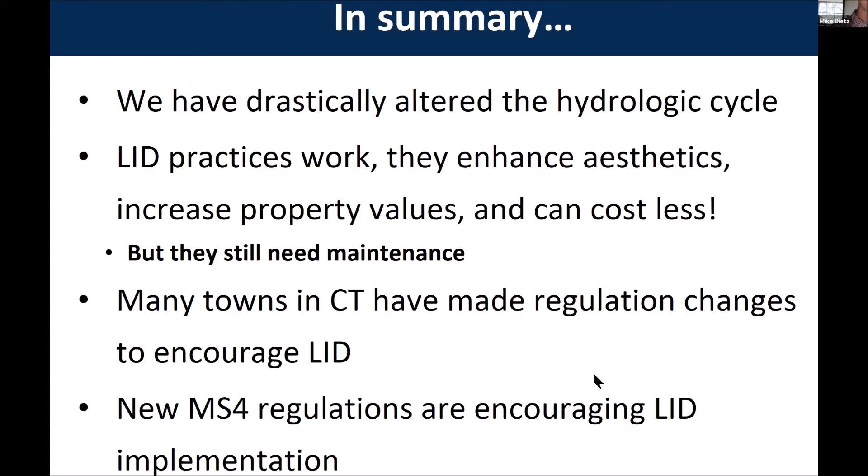Many towns in the state have made regulation changes to encourage LID, and I'll find the link for that. We do have a page that has what's called a story map, so you can go through there and see what towns in the state have made these changes that are LID friendly. I should have had that link in here. I apologize. And lastly, the new MS4 regulations are encouraging LID implementation. So that's all I have for the formal part of the talk, and I'm happy to answer other questions you might have.

Mike? Yes. Yeah, I have a question. A couple years ago, I put in a rain garden because we put an addition on our house. I worked with engineering on this, and the actual installation was not horribly expensive, but the engineering, even for a residential rain garden, can be $3,000 to $4,000. That's a lot. Yeah, and I got a lower quote for less than that. But on your tool, would that potentially meet the requirements? So say a homeowner could potentially self-design it if you had some environmental background?

Definitely. Yeah, I guess it really just depends on what the town requires. So all the tools are in there in that website and in the app. You don't even really need an environmental background necessarily. I think if you can follow the instructions, the app and the website really do the calculations for you. So it's pretty straightforward. I think most people can probably do okay with it. And you know, we're here as a resource too.

We have some recorded webinars where I go through in more detail talking about how to design and install rain gardens. So if you have folks in your town that are interested in that, I'm happy to direct them to some of our materials that we have. Because it's a great idea to control runoff, and they can be relatively simple, but the design, when you get an engineer and PE involved, they definitely charge more than geologists do. Right. Yeah, for a residential one, in most cases, you don't really need an engineer.